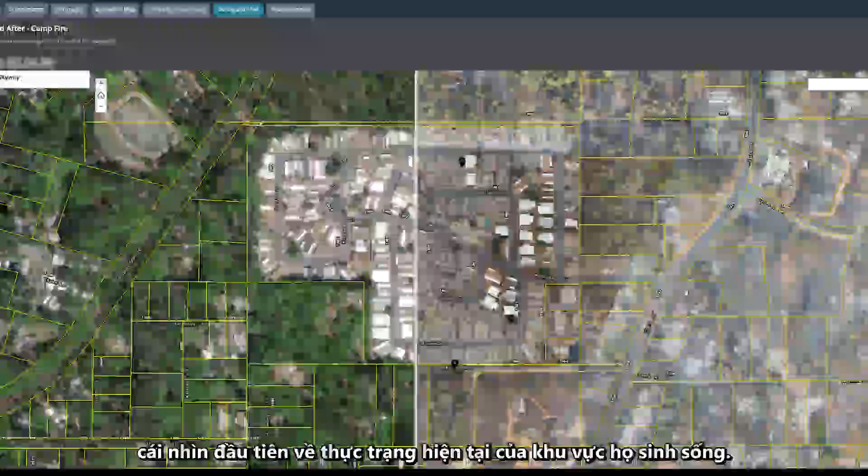For the mapping alone, we conducted over 500 flights, collecting over 70,000 images, rushing the data daily to our partner DroneDeploy in San Francisco. Within less than 72 hours, we had the largest multi-rotor orthomosaic map ever done, and it got fully integrated into the Butte County's GIS system and website, providing displaced residents a first look at their communities and homes. This data also helped speed up insurance claims and the rebuild process in Paradise.

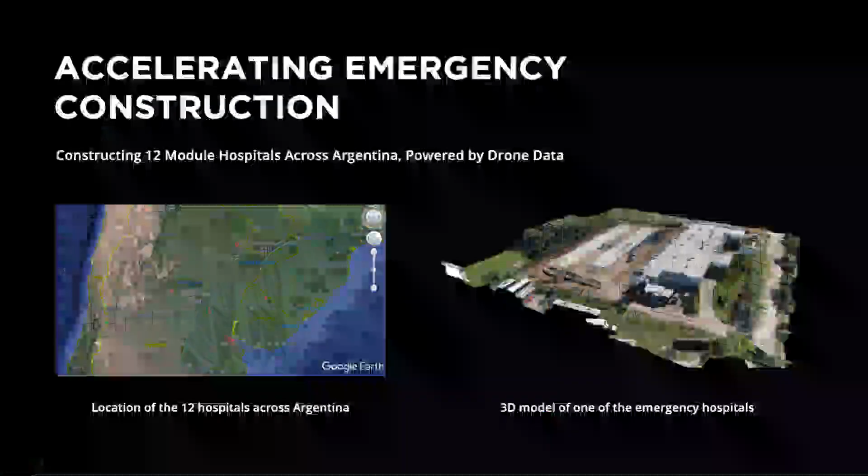The rich geospatial data not only helped in response to the natural disasters, but we also saw drones delivering potentially life-saving data that otherwise would not have been available during the early stages of COVID. One such example stems from the overwhelmed healthcare systems across the world. As hospitals quickly exceeded capacity, the need for quick and efficient expansion of more hospital space has been necessary in countries around the world. For instance, in Argentina, public and private organizations had to come together on short notice to build 12 modular hospitals in the hardest hit areas. These hospitals would add a total of 1,200 beds, including ICUs, isolation rooms, and other necessary equipment to treat critical patients. The urgent nature of the construction required the teams to act fast.

Equipped with drones, the teams were able to survey the 12 locations and over 10,000 square meters in just 3 days. After the on-site data collection, they processed the images for the final result. Using photogrammetry software, they were able to process over 6,000 images and create 2D and 3D maps with detailed information about the construction sites. The digital maps became a valuable resource for efficient planning and quick execution. Just a few hours after the drones surveyed the sites, the data collected was available in collaborative cloud environments which all organizations taking part in this project had access to.

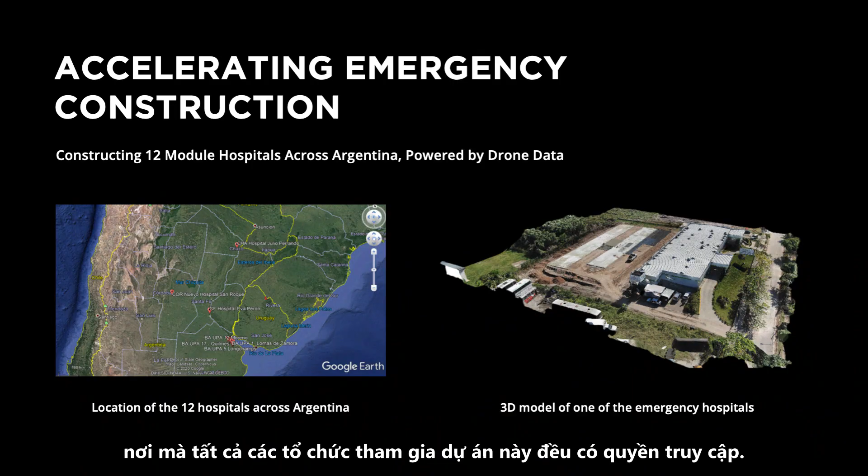With shelter-in-place orders issued across the world, businesses started to look for ways to continue operations in a remote and contactless manner. Now more than ever, construction and surveying companies are looking to drones to improve worksite efficiency and safety. The encouraging drone stories illustrate how powerful data can be, especially the highly accurate, accessible, and detailed data that drones can provide. DJI's purpose in the geospatial data world is to provide tools to help professionals in the surveying and mapping industries to collect critical insights, democratize surveying, and make drones standard pieces of equipment in the surveyor's toolbox.

As we have seen, geospatial data is important to businesses, and DJI is committed to optimizing the products and services to support digitization. As companies and organizations embrace digitization, drones play a critical role in creating regular, accurate, and detailed models of real operations. In the drone industry, the surveying and mapping missions that create digital representations of the world underpin the entire industry. In line with the goals to provide tools for businesses and people to future-proof themselves, earlier this year, we released our flagship model, the Matrice 300 RTK, which boasts a 55-minute flight time, protected by an IP45 ingress level, and commanded by a variety of intelligent features.

This was quickly adopted by professionals across industries. Now, to expand on the M300 RTK's capabilities, we are launching a photogrammetry solution for smarter, faster, and more accurate reconstruction of reality. Meet the Zenmuse P1.

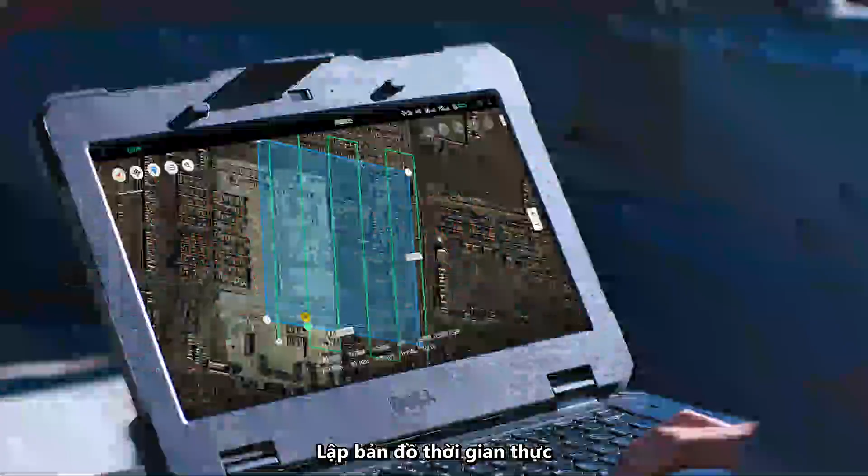The real-time mapping allows you to generate 2D orthomosaics in real time using DJI Terra, so you can access intel quickly on site. This is especially valuable for a time-sensitive mission where timely results can eliminate a lot of guesswork and uncertainties.

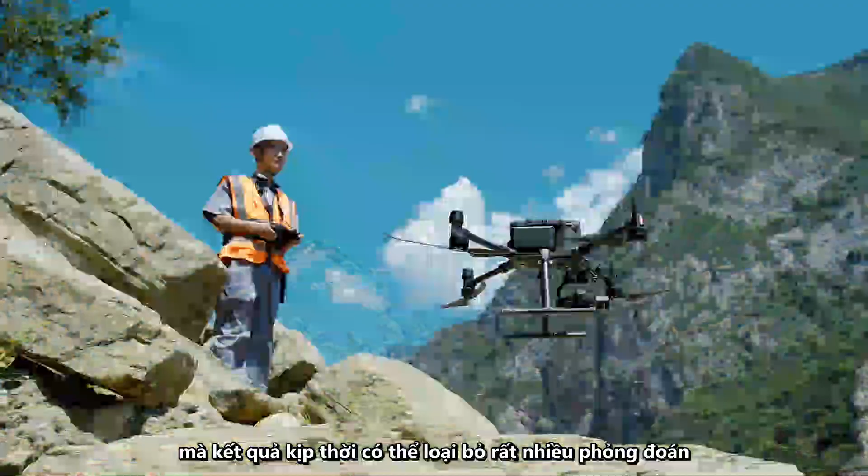Fieldwork report can help verify data quality immediately post-flight by checking the position data and number of images acquired, as well as the RTK status and position accuracy. This allows you to make quick decisions on-site or pre-fly a route to check that the flight plan can deliver the results that you want.

Next, let's take a look at how the P1 can be used. In a topographic mapping scenario, you can capture data that meets the 1:500 scale topographic mapping accuracy requirements without GCPs. In a cadastral surveying scenario, you can quickly generate 3D reality models that can be used for centimeter-level accurate cadastral surveys.

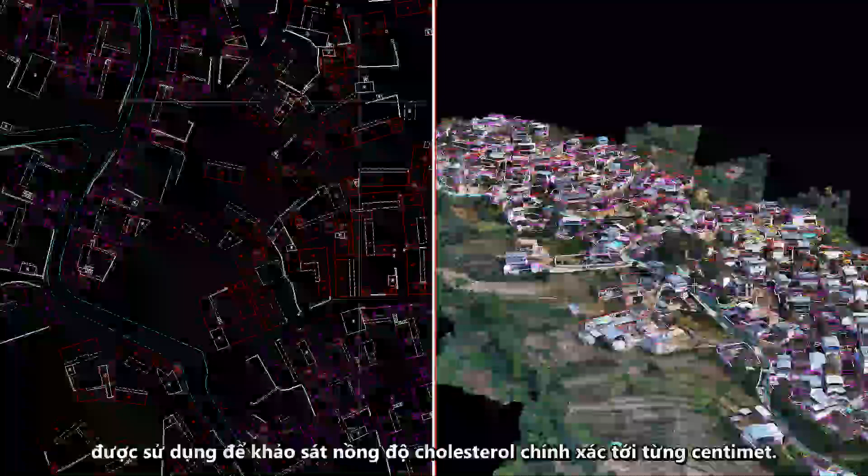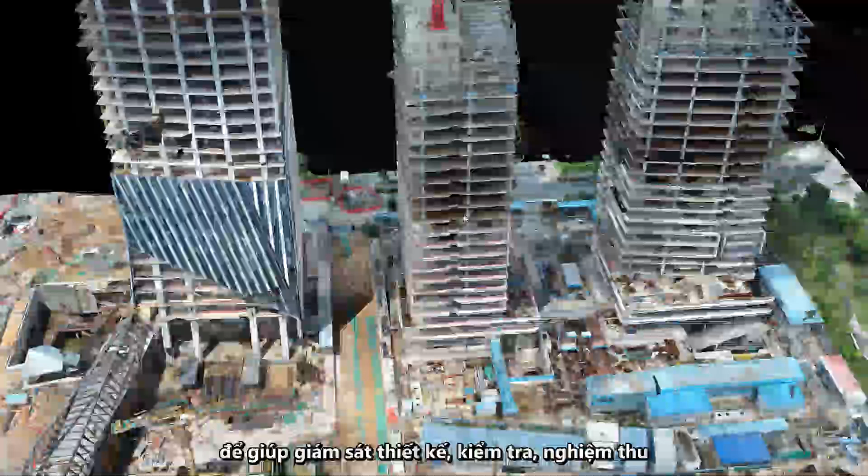In an AEC and surveying scenario, you can capture highly accurate 2D and 3D information to help design, monitor, inspect, accept, and maintain structures such as buildings, roads, bridges, power lines, and oil and gas pipelines.

In a natural resource management scenario, you can conduct detailed surveys of natural resources such as forest and water bodies to measure area and distribution, identify the resource type, or determine ownership. For geological investigations, you can gather centimeter-level accurate aerial data of geological hazard sites so personnel can easily evaluate the situation without being exposed to any danger.

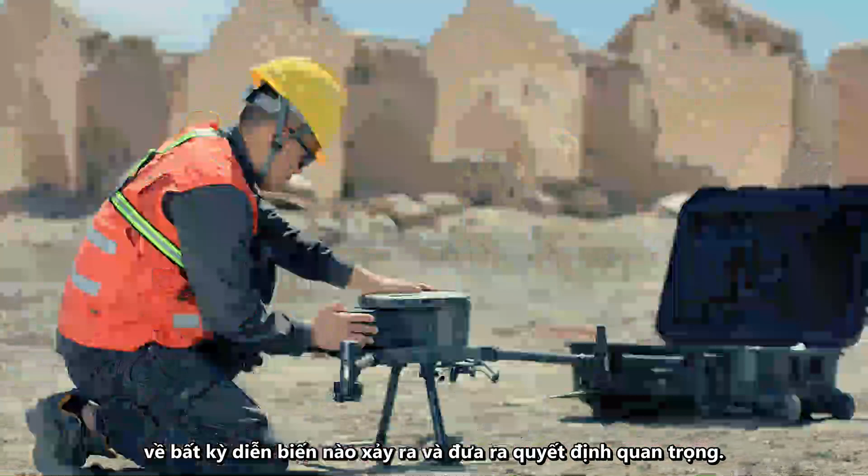For disaster site modeling, you can gain real-time overviews of vast areas during or after a disaster so emergency response teams can stay informed of any developments to make critical decisions. Our partner, Vermessung 3D in Germany, conducted tests using the P1 for the coastal research stations, which is a part of the Lower Saxony State Agency for Water Management, Coastal Protection and Nature Conservation in Germany.

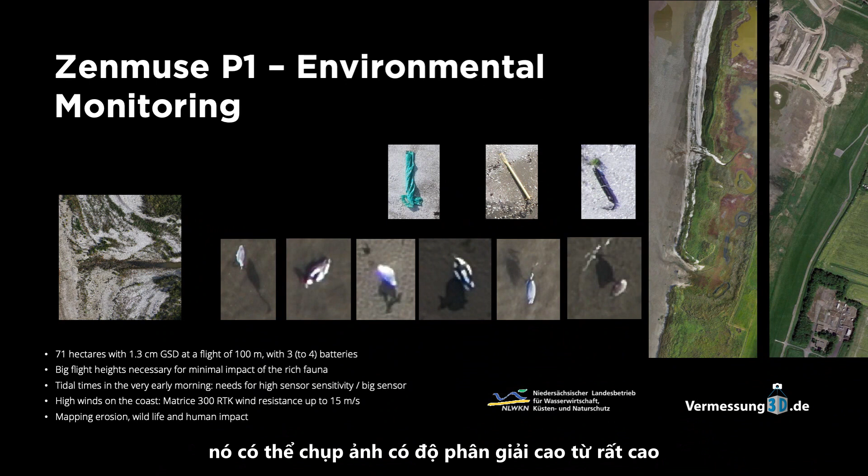For environmental monitoring, the P1 demonstrated that it could capture high-resolution photos from very high up, so as to not disturb the wildlife. The high-sensitivity sensor was capable of capturing images despite poor lighting conditions at dawn. In mapping a floodgate, the benefits of the P1's high dynamic range were helpful when there was a lot of contrast between the bright sunlight and dark shadows.

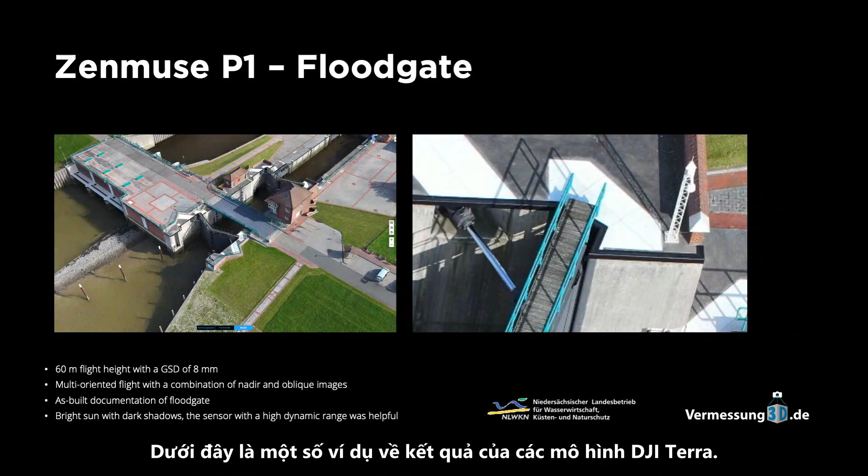Here are some of the examples of the resulting DJI Terra models. As you can see, the P1 is capable of producing highly accurate models, and I'm confident it will be a great addition to any surveyor's toolbox.

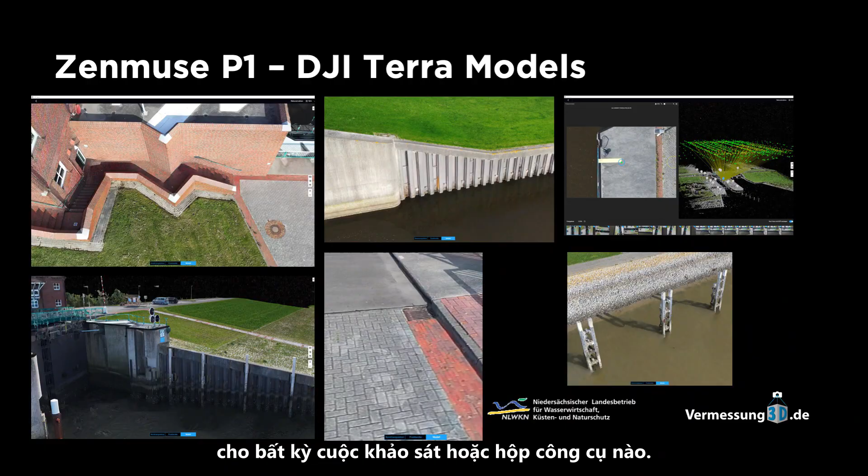In addition to breaking ground in the aerial photogrammetry world, we're also committed to making LiDAR technology accessible to surveyors. In the aerial surveying sphere, LiDAR technology plays an important piece of the puzzle to creating accurate reality models. In low-light situations or in areas of heavy foliage, LiDAR is able to provide quick, precise point cloud models of complex structures. With regular inspections, teams are able to check for quality, compare with blueprints, and spot errors before they become a problem, hence reducing the need for rework.

That's why we're not just launching the P1, but we're excited to announce the new Zenmuse L1 so that you can have true color point cloud models of the real world. The Zenmuse L1 integrates a Livox LiDAR module, a high-accuracy IMU, and a camera with a 1-inch CMOS on a 3-axis stabilized gimbal. When used with the Matrice 300 RTK and DJI Terra, the L1 forms a complete solution that gives you real-time 3D data throughout the day, efficiently capturing the details of complex structures and delivering highly accurate reconstructed models. The L1 packs a lot of features in a compact IP54 certified body.

It integrates a LiDAR module, an RGB camera, and a high-accuracy IMU. Together, this turnkey solution delivers results with both high horizontal and vertical accuracy. The Livox LiDAR module we've selected supports 3 returns to penetrate through foliage and complicated terrain to produce even more accurate ground models. At the same time, thanks to the powerful M300 platform, you can fly and capture data across over 2 square kilometers in just a single flight, allowing for greater efficiency in mapping your targets.

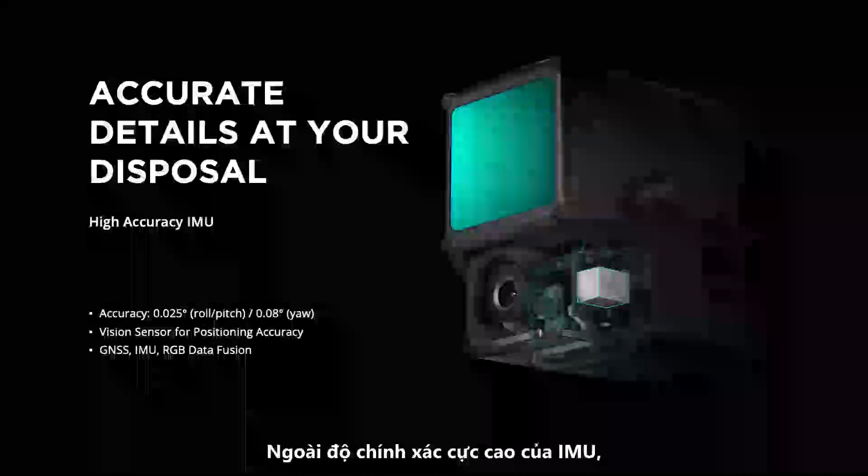The L1 has a 20 megapixel RGB camera with a 1-inch CMOS and a mechanical shutter, and is really what allows it to provide true color point cloud results in real time. In addition to the extremely high accuracy of the IMU, the added vision sensor is very important for improved position accuracy in times of degraded GNSS signals. With all three of these modules combined, the L1 is unparalleled in its ability to deliver georeferenced true color point clouds. Next, let's take a closer look at some of the features of the L1.

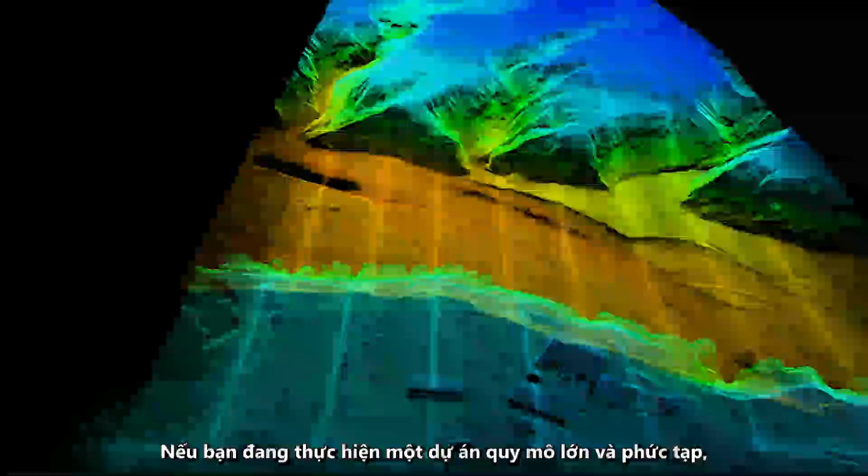Real-time point clouds provide immediate insights on-site, so operators are informed to make critical decisions quickly. If you're doing a complex large-scale project, you can use this feature to verify fieldwork quality by checking point cloud data immediately after each flight. You can acquire and communicate key dimensions on the point cloud model using measurements and annotations. Using DJI Terra, the L1 fuses the IMU and GNSS data for point cloud and visible light calculations, so you can effortlessly generate reconstructed models and accuracy reports. The L1 is an affordable and scalable solution for the skies.

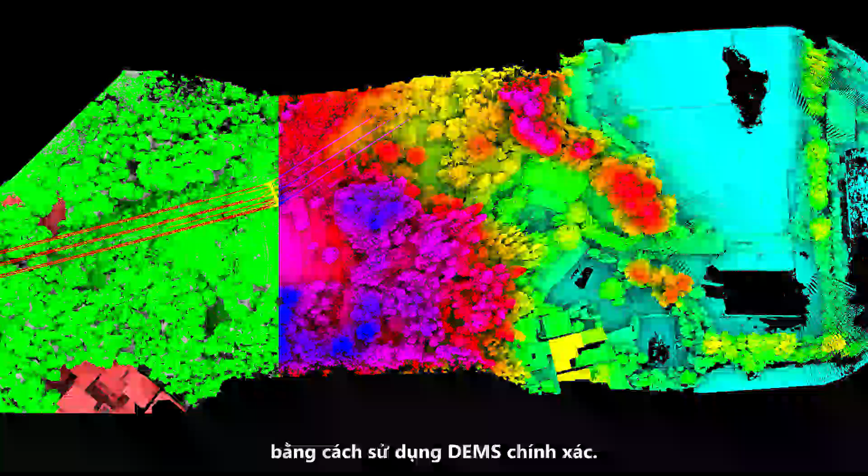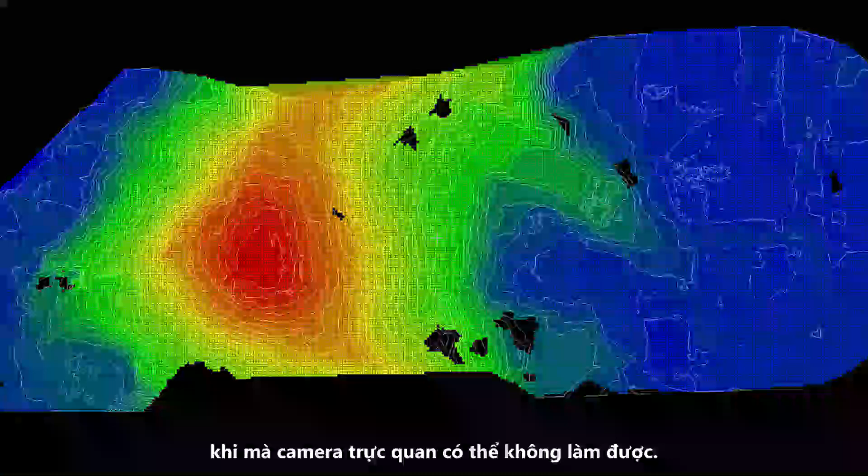Here is a list of application scenarios where we think the L1 will serve the wider surveying and mapping industry. You can quickly generate topographic maps using accurate DEMs thanks to the multiple returns of the LiDAR that penetrate vegetation canopies. This will be very helpful in mapping densely foliaged locations where a visual camera might fail. Using the highly accurate point clouds in 3D models, you can design, build, monitor, accept, maintain, and inspect construction projects. The full construction project lifecycle could really benefit from the L1. When an emergency hits, response teams can gather critical insights on situations in real time using true color point clouds.

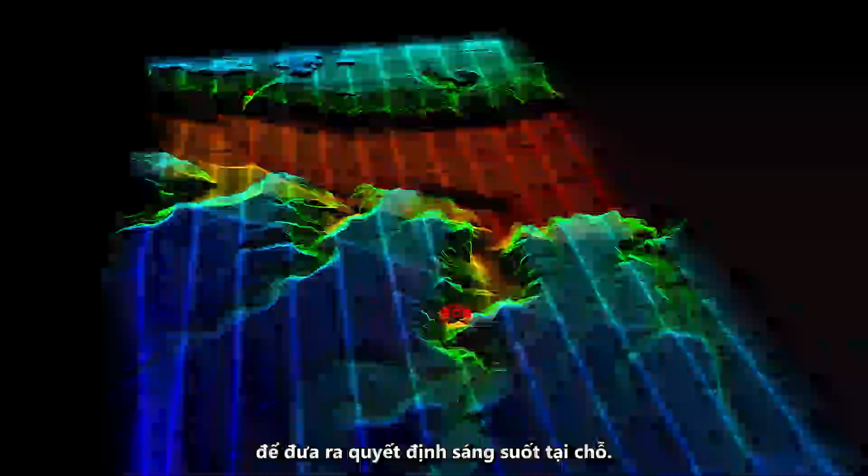You can gain situational awareness or capture forensic intel in real time for informed decision making on site. You can model sparse or complex structures like power lines or oil pipelines in detail so teams can more effectively manage these assets without large personnel or time commitment.

These structures can be difficult to capture using visual sensors as well, so a LiDAR would come in handy. Similar to previous applications, the Zenmuse L1 penetrates vegetation canopies to create point clouds that provide insight into vegetation, including canopy width, vegetation density, area, stock volume, and growth trends. We've already seen LiDAR be put to good use in the field.

The mobility and efficiency of the flight execution, as well as the seamless connection to DJI Terra, makes this solution an ideal addition to any surveying workflow. The area of interest contained freestanding trees, buildings, roads, meadows, a river, and oil infrastructure construction, which made the environment very complex to map, but the L1 delivered accurate results quickly.

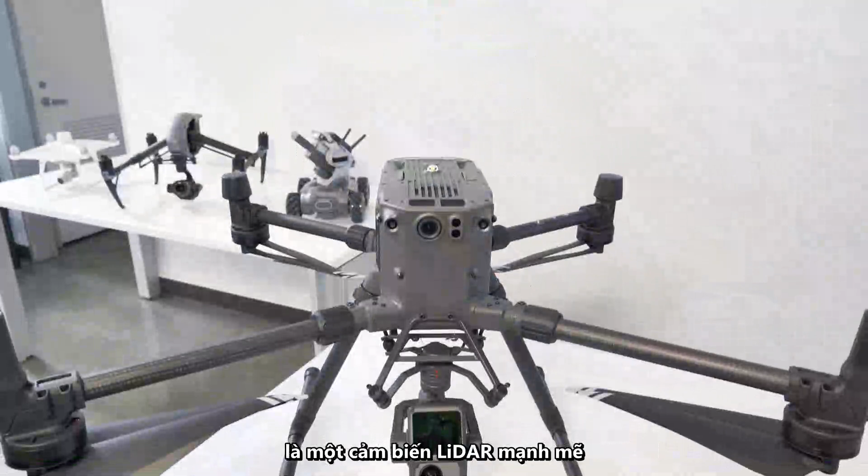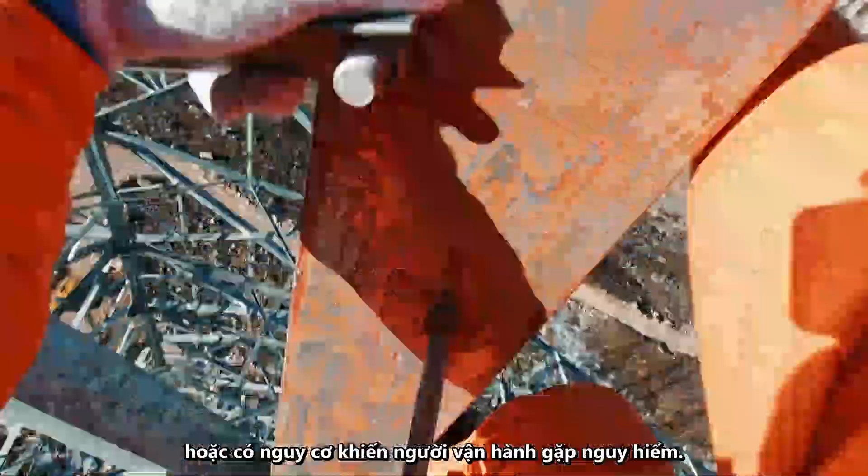The initial processing produced a georeferenced point cloud model containing 80 million points, and the final model had an average density of over 1,000 points per square meter. All of this goes to show that the Zenmuse L1 is a powerful LiDAR sensor that could simplify the recreation of realities for users in many industries, where teams traditionally had no choice but to rely on more expensive equipment or risk potentially putting operators in danger.

Now that we've seen what the Zenmuse P1 and L1 are all about, I'd also like to showcase the current lineup of surveying solutions that DJI has to offer. First up is our entry-level solution, the Phantom 4 RTK and DJI Terra. Featuring a 1-inch 20-megapixel CMOS sensor, the P4 RTK fits in a backpack and can take off in minutes, a gateway solution to our more advanced offerings.

Next, your new go-to aerial photogrammetry solution, the Matrice 300 RTK, the Zenmuse P1, and DJI Terra. A highly accurate solution that achieves 5 cm vertical accuracy without GCPs. Thanks to the long flight time of the M300 RTK, you can cover larger areas in a single workday while meeting the highest accuracy requirements.

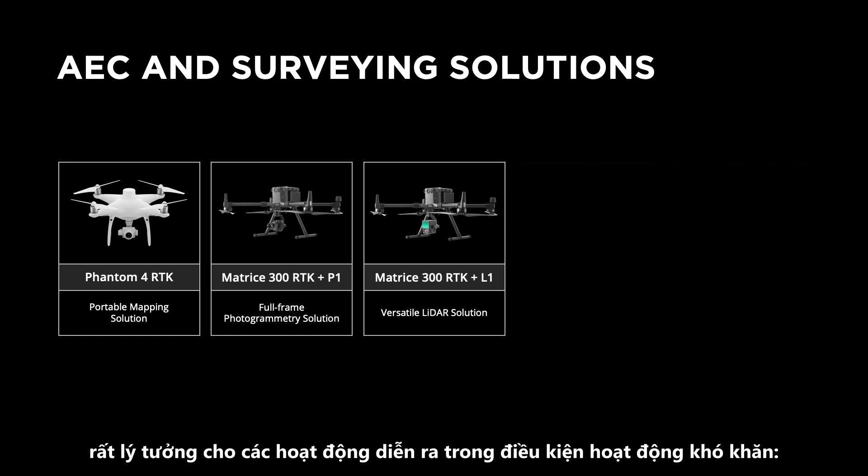Now, the Zenmuse L1 makes up a versatile LiDAR solution with the M300 RTK. Ideal for applications that take place in less than ideal operating conditions, with tight time constraints and high accuracy requirements requiring DEMs. In addition, we also have a compact integrated multispectral imaging solution, the P4 Multispectral. The solution is great for quick vegetation index analysis on farms to help manage crop health or for forest and natural resource management.

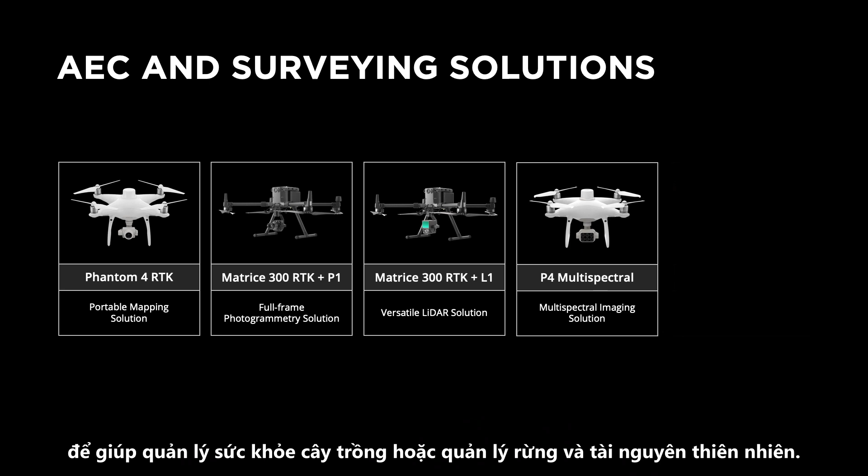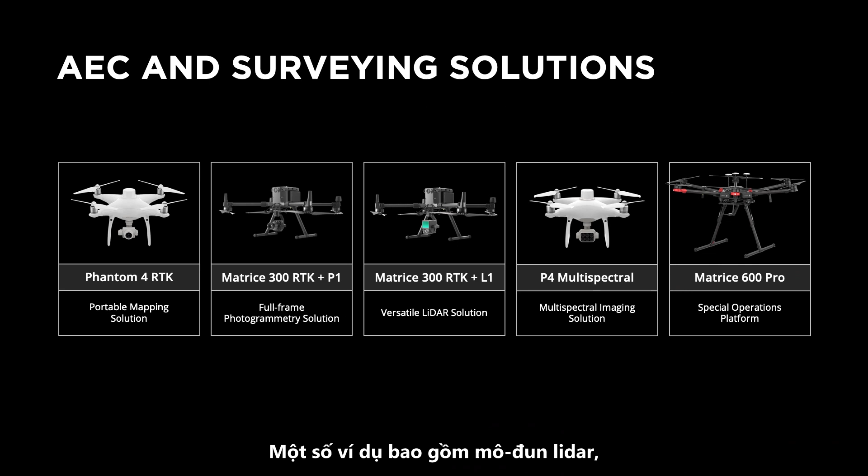Finally, the Matrice 600 Pro is our heavy lifter drone that supports a variety of specialized third-party payloads. Some examples include LiDAR modules, multispectral or hyperspectral sensors.